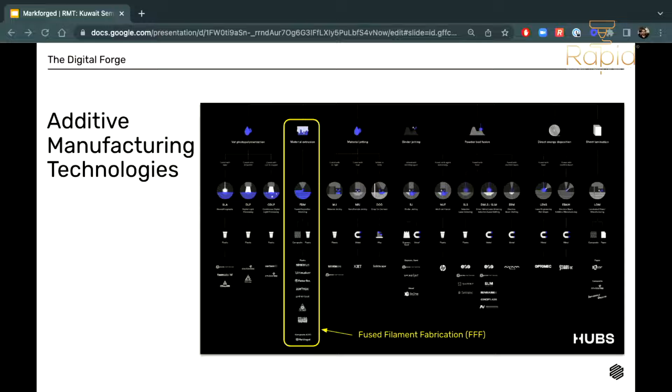Where Markforged situates is in this column right here—what we call fused filament fabrication. Essentially that's a fancy word for extruding material layer by layer until you have your 3D printed geometry. I like to compare it to a glue gun, just extruding materials layer by layer, as simple as possible. This is probably the most common form of 3D printing in today's market, and its benefits are that it's easy to use, easy to scale, and people are very familiar with it. Once you build in higher performance materials, better accuracy, and more speed, it becomes a very scalable process.

When we look at our hardware, all of it is built with strong aluminum frames to ensure a rigid printing platform made for the manufacturing floor. The rigid frame helps maintain extremely high accuracy and repeatability between printers. They're all overbuilt, so the technology can grow and develop over time without changing the hardware.

For example, we do a lot of that through software. Software is really the backbone of how we develop and improve our systems over time.

The X7 over there, the dark gray printer on the ground, that's our flagship composite printer. That's been our most popular printer for a long time because it delivers the highest precision and strongest composite 3D printed parts in the market today.

That printer was built with a high precision laser that does bed calibration. It just helps calibrate your tool - a pretty simple task that a lot of people can do manually. We've updated that laser over time, through software, to do in-process inspection.

One of the biggest problems with 3D printing today is you print something and have no idea what you get - no idea if it's accurate or strong. That laser now tells you how accurate it is and produces a report you can hand to your customer, showing this is the part you designed, within the tolerance requested, so they can validate it for immediate end-use applications versus going through a secondary scanning operation, which adds lead time, cost, and a new process you'd have to train and educate on.

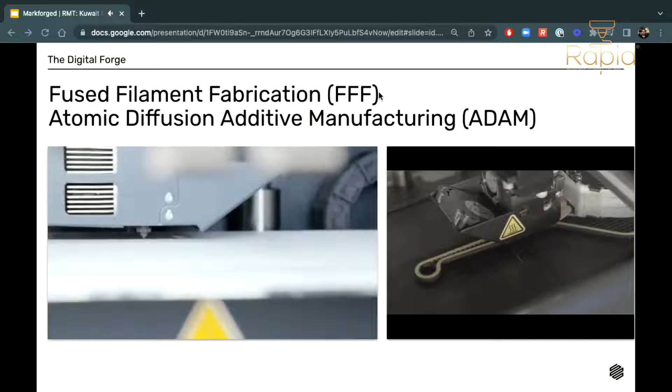Your print is built of two materials stored in a heated chamber above: one ceramic release material and one metal to be printed. This filament material is metal powder safely suspended within a two-part plastic binder. It gets heated and extruded onto the build plate where the part is created layer by layer. The release material gets extruded as an interface between the part and its supports.

So once your part comes out of the furnace, it's easy to remove. Unlike other metal 3D printing systems, this process does not require loose metal - just one thing to mention here.

With extrusion 3D printing, it's one of the most widely known and accepted modes of 3D printing, so we've simply adopted that with metal 3D printing. Now we focus on continuous fibers and plastics, which I'll talk about shortly.

The metal process is basically a print, wash, and sinter process. It simplifies what we know as metal 3D printing today, which is typically done with powders. Powders are dangerous, often very costly, and have a very high educational curve when it comes to being able to implement metal 3D printing.

So our approach was taking our Mark II and our X7 and transforming that to do metal 3D printing with a couple of added steps. Essentially, this is what we are going through here today: we have our printing process, then we go through a curing process with a chemical, and then a sintering process.

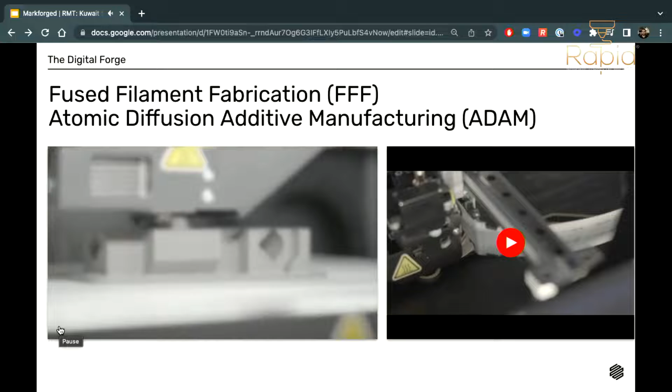One is a chemical solvent, a very harmless chemical that basically debinds the part, and then it goes into a sintering process, a furnace essentially, which cures it as a fully metal component. Typical systems use lasers to basically melt the metal, which is obviously very high energy consumption.

This is difficult to maintain and upkeep and expensive. This simplifies the process to a simple extrusion system, and then taking your part, moving it to one system, taking it out, moving it to the next. So it takes a very complicated system and makes it very, very hands-off, with the same educational curve that you'd expect from a simple plastic printer that you can buy for $1,000.

So when we talk about the educational curve with students, this is where people would start, and they would simply migrate, after learning this, to the metal process. So making it very, very scalable across the lowest common denominator.

When we look at additive manufacturing, you might have somebody who's never touched 3D printing. They could be a machinist of 40 plus years who knows how to work with their hands. And then you might have a student that has 5 years of 3D printing experience. We try to accommodate that entire span of educational curve—the people who are brand new and the people who are highly expert.

So when we talk about that, I'll discuss the software a little bit more, but we're trying to make this scalable. And in order to scale, you need to make it accessible for everybody.

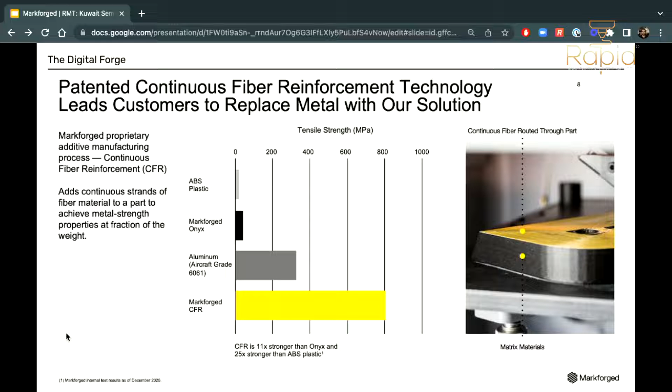And with continuous fiber reinforcement, you control exactly how strong your part is going to be. You can have a little bit of fiber, you can have a lot of fiber. That really gives you the power to optimize how strong your parts are for cost and lead time, making it a very efficient process.

When we talk about why people buy Markforged these days, there are a couple of reasons. One, we have an unmatched surface finish. For an FDM or FFF extrusion process, people commonly say the quality of the parts is no good and doesn't look professional or end-use. The reason people come to Markforged is because our parts look like an end-use part, competitive with injection molding in many cases.

They have high chemical resistance and high heat tolerance, so they can be exposed to more rigorous conditions, whether that's oil, cutting fluids, or water. We use these in hot and cold temperatures. It's a very robust plastic that can be a direct replacement for a lot of different metals.

And it's built tough. I have this example right here, a lifting rig. We'll talk more about that case study later, but it's certified to lift over 1,000 kilograms. That replaces a steel tool used by Wärtsilä for large ship manufacturing.

When we talk about what materials are important, we like to say that the future is composites. We're obviously a metal 3D printing company as well, but we often find customers come to us asking for metal, and we find that composites is a better solution because it's faster, lighter weight components, the costs are more optimized, and it's a generally easier process. For applications where you do need metal, the Metal X is a great solution, but composites are becoming more and more of an adopted standard in manufacturing today.

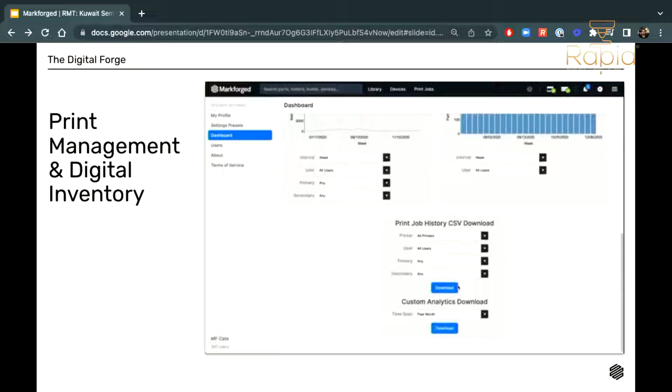And then print management. Knowing how to use your system efficiently is really important. Eiger captures a lot of data to figure out who's printing, what type of printer they're using, what material they're using, so you can assess and make decisions based on this data. If you know you're using a lot of material in November, your procurement can then procure that material in October to plan that production cycle. This allows you to make informed decisions on how you optimize your schedule and how you manage your print farm.

And then when we talk about deploying at scale, because obviously most companies start off with one printer and quickly scale to 10 printers, 20 printers, 100 printers, we have software built for that to be able to scale and create this distributed manufacturing.

Eiger Fleet is one of those core products we're offering that allows you to adopt this on a more enterprise level system. This includes on-demand printing, your digital inventory, an organized structure for managing your parts, managing your teams, high security features so your data is protected, and real-time improvements, being able to send improvements via the cloud.

When we look at Eiger Fleet, we have SAML and single sign-on. If you're, I'll use the Saudi Aramco example since they're a large company, we can allow them to use their domain of aramco.com to invite 1,000 users who will then have access to Eiger to log in and start creating prints, kicking off prints, and adopting the 3D printing process. This is all on the cloud, so it's very easy to scale by just accessing it. You don't need to download a physical program.

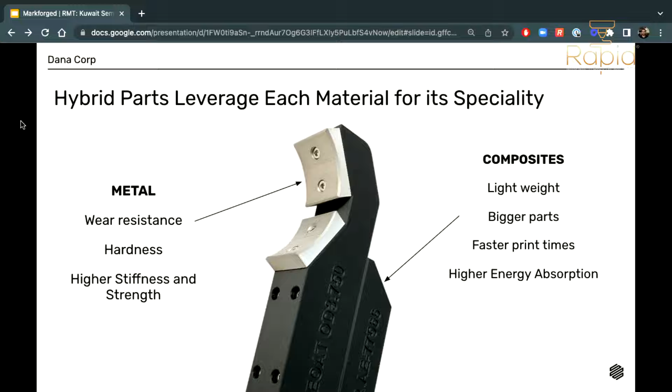So printing this out of metal would be much, much more expensive. But the composites create a much more economic approach to doing this, and now you have a multi-part assembly where you're stocking small parts versus very large parts, reducing that inventory cost.

There are going to be parts where metal is definitely required. Composites aren't the solution for everything, so you have a competitive edge by being able to design and prototype in composites, and then when you want your final part, you just click a drop down and say print in metal, and it shifts that design over to metal so you can print that part out. That's where the software aspect makes us very competitive for covering the entire spectrum of parts.

Plastics for prototyping and maybe some non-loading conditions, continuous fiber for high strength, and then metal for wear and tear applications. Maybe you have pressure vessels that need to be fluid tight, or need extremely high heat resistance where plastic would typically melt.

A great example of a non-load bearing application for plastic is with this company, Cabin Management Solutions. All the parts you see in gold in this bottom picture are gold-plated onyx. Those are plastic parts actually going onto a plane, manufactured for end use, not for prototyping.

The material is a chopped carbon fiber material, nylon with chopped carbon fiber, and it actually holds somewhat of an electrical charge, so it's able to be plated with various metals like nickel and gold plating - we've also done silver plating - and that really produces a unique end-use component.

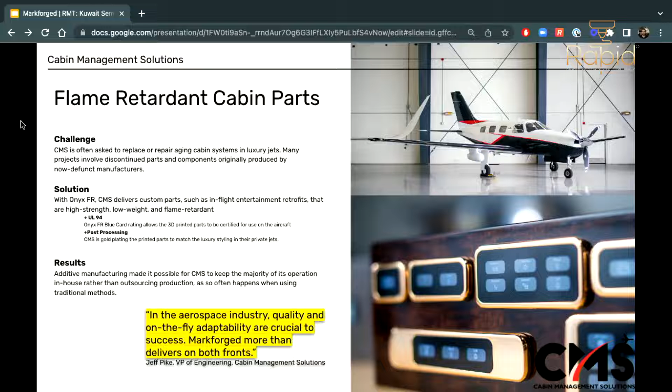The reason this material was able to go on the plane was because it's V0 certified, meaning it's self-extinguishing. To go on the plane as an end-use part, you need aerospace certification. The only way to do that was to have a material that was self-extinguishing and could also meet the criteria of high surface finish that could be plated with gold. That was really the benefit for this customer in this instance.

Legacy components - we see this a lot when me and Abdullah talk to customers, especially in the oil industry - is we have a lot of parts wearing out and no idea how to manufacture them because we don't have CAD files. These are legacy parts basically going extinct because somebody manufactured them 40 years previously.

They're no longer working, and now they need to figure out how to reverse engineer that part and manufacture it. The problem today is there's a diminishing group of people who know how to cast components, or do machining, or conventional modes of manufacturing. So we're moving more to a workforce that is digital, working in CAD and focused on 3D printing. When we talk about the value of 3D printing, you're converting to a CAD design versus a manufacturing process.

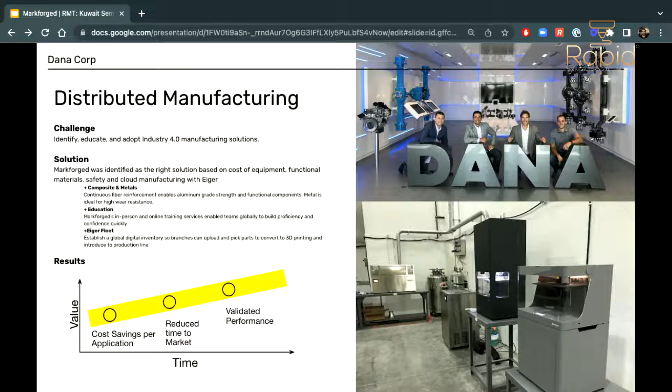So the reason why Dana chose Markforged in this solution was, yes, we're easy to use, the system's very reliable, you can beat them up and they're going to work and produce parts for you. But there were really no companies out there that had a great educational tool. With Markforged, we have Markforged University, a self-service online tool that allows you to learn design for additive manufacturing, learn how to operate your system, and how to get the most value possible. So this was predominantly an HR issue with how do we find the right people and how do we train them effectively to use the system.

Because all in all, you can buy a $1 million machine for 3D printing, and if you don't know how to use it, if you're not trained properly, and you don't know how to identify the right applications, it's going to fail. You're going to have a big, expensive metal box sitting in the corner collecting dust. You need to find value for your printers, and the way you do that is by educating early in the process so you have early success that you can compound on. You drive value through success, not through failures. When you have failures early on, people get deterred from using the technology, and they tend to do what they know.

So in this case, that's where Dana found their value, and again, another instance where they bought 2 or 3 printers in the U.S., and they've now scaled that to a print farm of 40 printers globally, making a $3 to $4 million investment in 3D printers.

Any of them in the Middle East? I don't believe Dana has any branches in the Middle East at the moment.

We talked about Wärtsilä briefly - this was the lifting tool that's certified for over 1,000 kilograms of lifting capacity. There's a couple different aspects that make this a really interesting case study. One, it's the first CE certified tool in the industry for composite 3D printing. When we talk about 3D printing, it's really difficult to get this validated for actual in-the-field use.

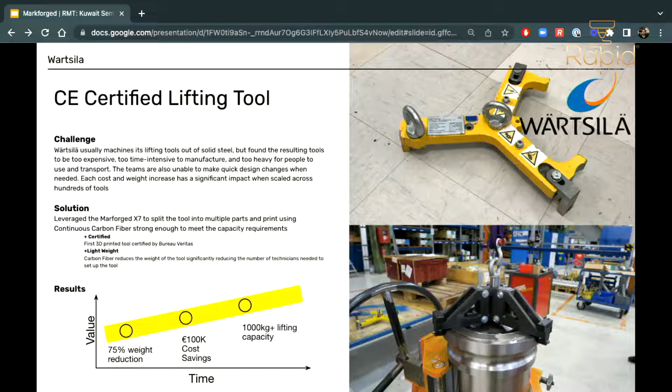So this is a great example of a very complex tool with very strict requirements that need to be certified. But in many cases, this isn't what people are doing. Some things can be extremely straightforward and very, very simple. These are the non-sexy parts.

So when we look at 3D printing, a lot of people like to create very complex geometries, organic structures, things that look very pretty and bright colored and fun. But in many cases, what the average manufacturer is doing is making very, very simple tools that accomplish a very simple job. And these are often the tools that drive the most value for customers.

Typically what they would have to do is machine these out of aluminum, meaning they're using their CNC machines to make tools to make their actual end-use part. When you're making tools, you're not making money. You need to make money through your revenue-generating parts.

So your 3D printer is your one-time cost operator. You pay $20,000 US for a printer that produces your tools while you make critical parts on your $300,000 CNC machine - that's where you make your money. This one is focusing on making small parts that you typically don't want to spend your time on, and this drove a lot of value for this team: 19x faster lead time and 2.5 times the cost savings on these parts.

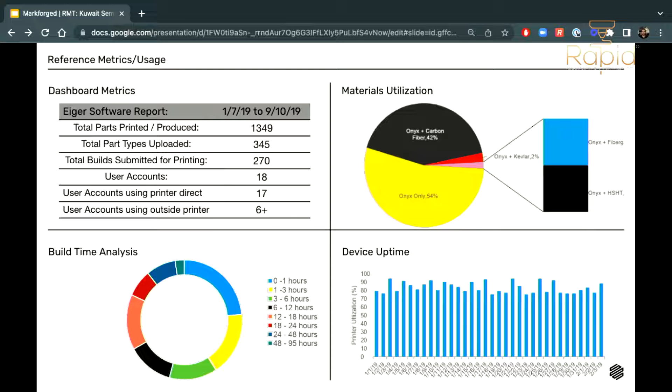Being able to leverage the data that you have today to scale it, bring more printers in-house, and get the most out of your system to make them as efficient as possible, so that you're manufacturing around the clock. And always build a plan. Building a plan over time is important, and sticking to those various steps is how people are successful implementing additive manufacturing.

So this is pretty much the end of the presentation. I guess we can leave it to questions at this point.

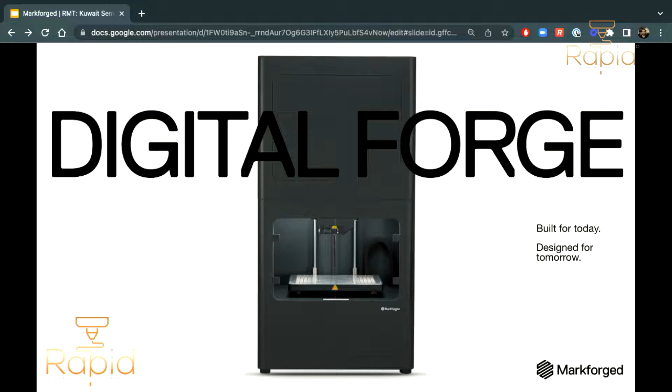Thank you, Kyle, for the interesting presentation. We have met earlier, maybe through the MS Teams. This is Lamia Al-Kendari, team leader, research and technology in KNPC.

The way that you presented the technology, it looks like the spare part will be ready immediately after it comes out of the printer. So is there any requirement for heat treatments to reach the required specifications, or is this something that you can control while running the printer environment?

Yeah, that's a really great question, and it's a challenging one to answer. So with every process, there's obviously a learning curve and different requirements. Obviously, when you look at a cast component compared to a machined component, the mechanical properties are very different, and you need to look at what the end result is going to be.

So what we always talk about in the industry is we're not in the business of replicating. We're reinventing, we're re-engineering a part for the process. So when we take a part and see that today it's manufactured via CNC machining, it's a specific material, it goes through a specific heat treating process, and it needs to have a specific strength.